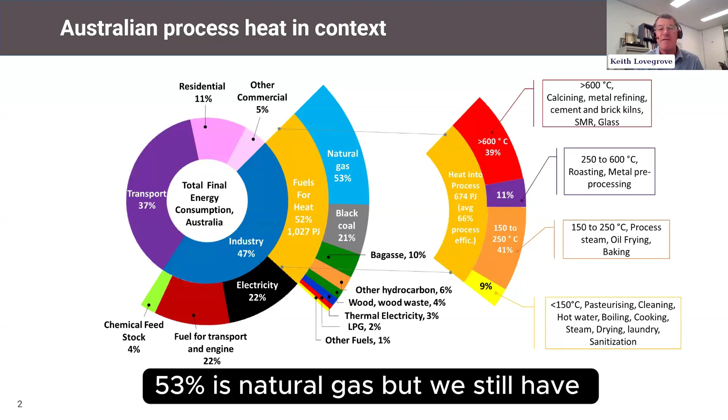Yes, so solar thermal. Thought I'd begin with a little bit of context for Australia. And this is a very similar picture to what you'll find in basically any industrialized country these days. So if we look at total final energy consumption, about 47% is our industry, and of that, 52% is for heat. And of that, at the moment, 53% is natural gas. But we still have black coal being used for process heat in Australia.

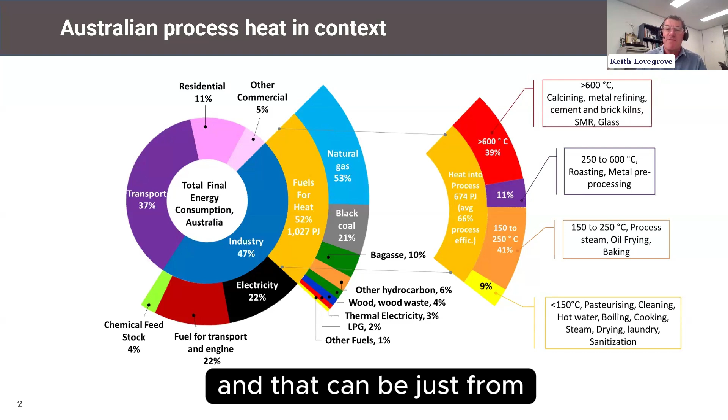Now that we're talking about solar thermal, it's very important to consider the temperature breakdown of the usage. And you can see there that there's quite a lot in that 150 to 250 degrees band. There's also an awful lot in this greater than 600 degrees, and that can be just from calcining and iron and steel and very high temperature processes like that.

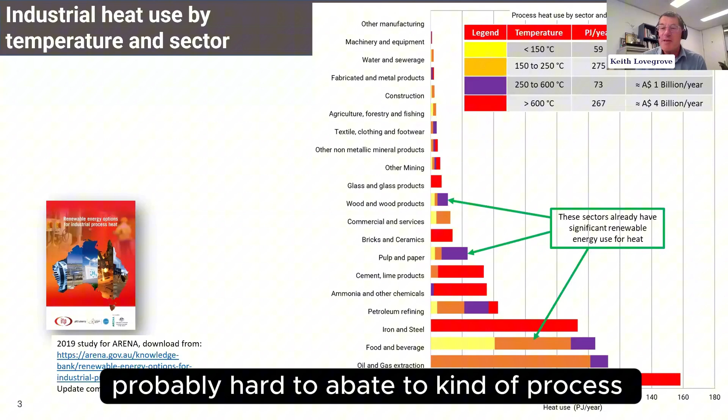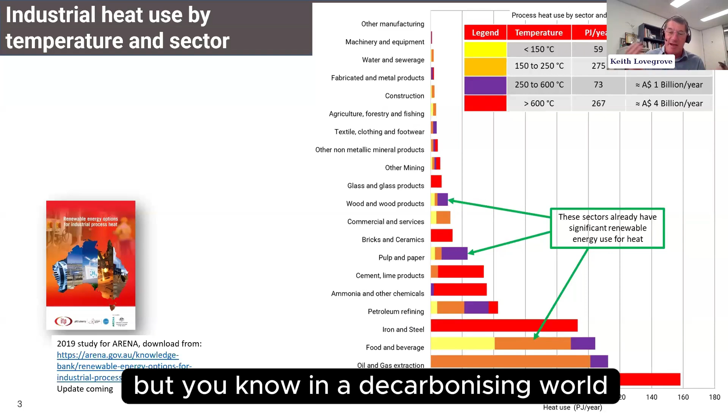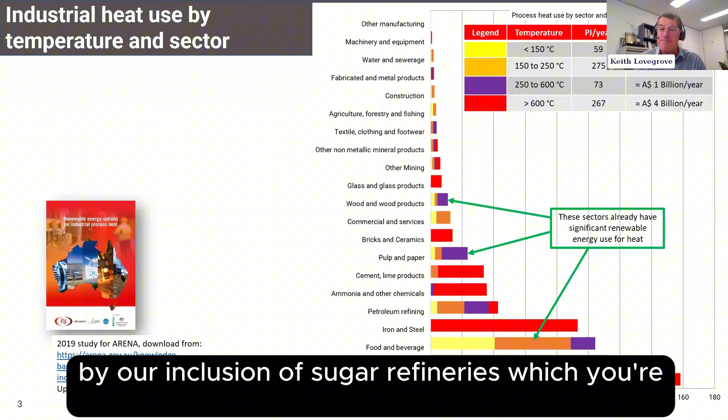So looking at the different sectors that are dominant, we've got the alumina sector as a very big user of heat, and theirs is split sort of 50-50, some very high temperature calcination, probably a hard to abate kind of process, if you will, and a lower temperature digestion. We've got oil and gas, significant there, but in a decarbonizing world, you might say, well, where does oil and gas go? Food and beverage is very important. That's dragged up in that analysis by our inclusion of sugar refineries, which are already using a lot of bagasse waste. So when you take them out, it drops down a bit.

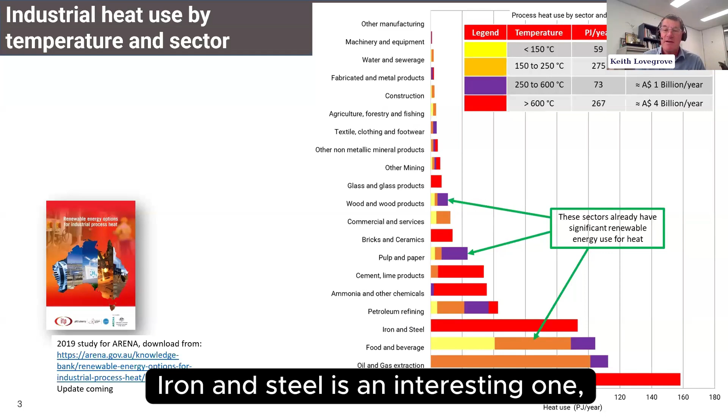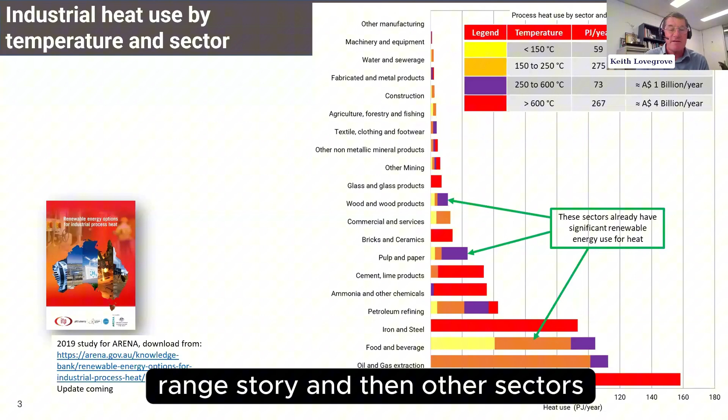Iron and steel is an interesting one. And we've got the whole discussion of Australia as a potential exporter of green iron into the future, but that's a very long range story. And then other sectors going on down there with different temperature splits.

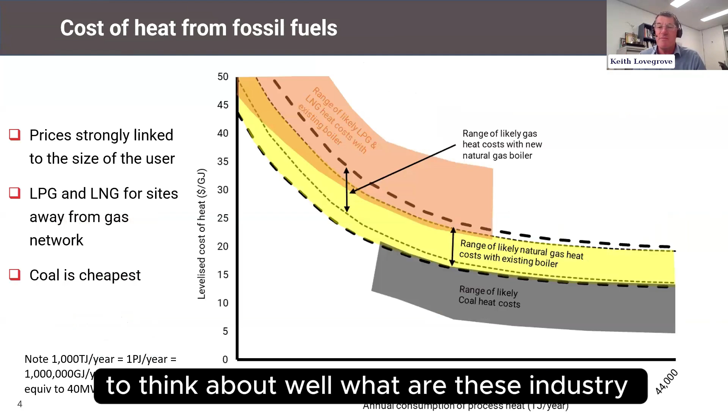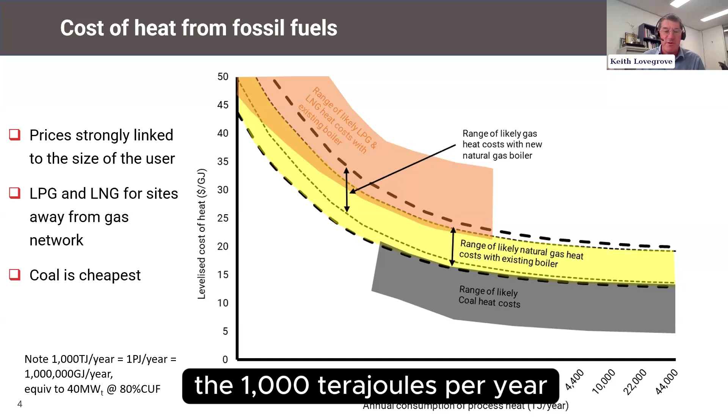We do need to think about the economics, and in that regard, we need to think about what these industry players are paying at the moment. If you look at the yellow bar in the middle, that's to represent natural gas prices. First of all, I'll point out that the horizontal axis there is a logarithmic scale of terajoules per year of consumption. To put that in context, 1,000 terajoules per year would be like a 40 megawatt thermal use at 80% capacity factor. So 100 is 4 megawatts, 10,000 is 400 megawatts.

So very large users, the very, very large 100 megawatt alumina refineries and so on, are effectively paying the wholesale price of gas, which is, according to that graph, between $10 and $15 a gigajoule, very uncertain. But the y-axis there is levelized cost of heat. So that's factoring in an approximately 80% conversion efficiency from the gas to the heat, which is why the wholesale price doesn't match the levelized cost of heat.

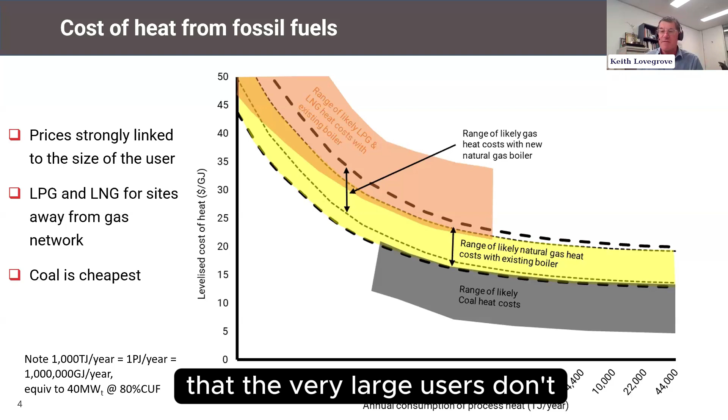It's rather higher. But what you see is, as you come down to smaller users, they pay more and more. They have to pay distribution and retail costs that the very large users don't. So you get that sort of power law dependence. Now, there are some large users still using coal. That's, of course, cheaper. There's some users who are not connected to the gas network who actually have to truck in LPG and LNG. They tend to be smaller, hence those there. So that's what we're competing against.

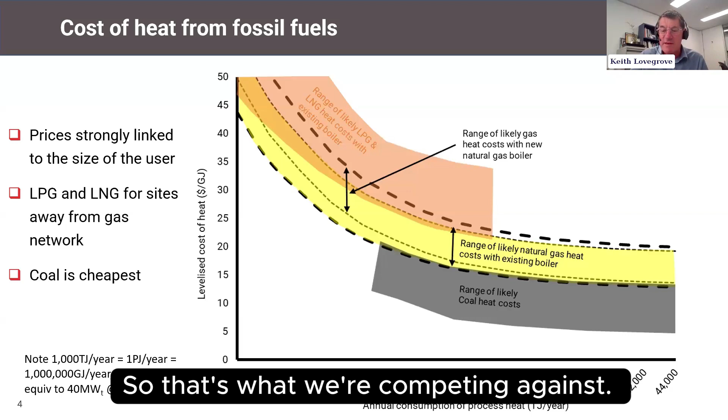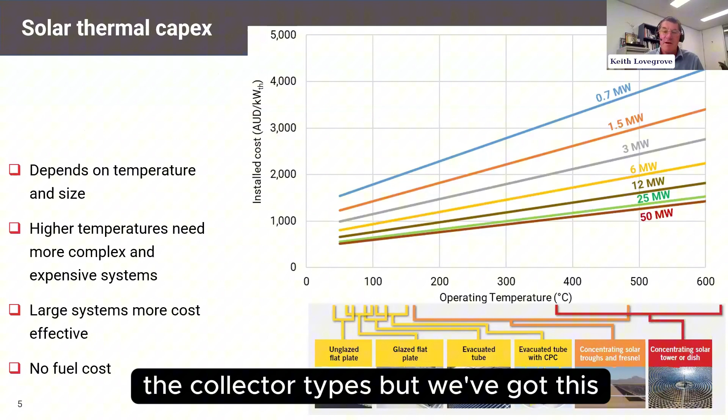With solar thermal, Bärbel's already introduced the collector types, but we've got this progression from, at one extreme, unglazed flat plate, which is your swimming pool heater on your roof at home, just to warm things up to 60 degrees maybe on a good day. And what we're trying to show here is that as you go from left to right on that graph, you're facing increasing complexity in technology in order to get higher temperatures.

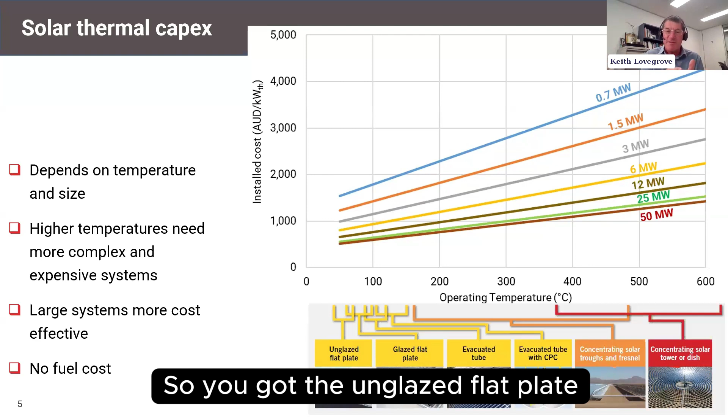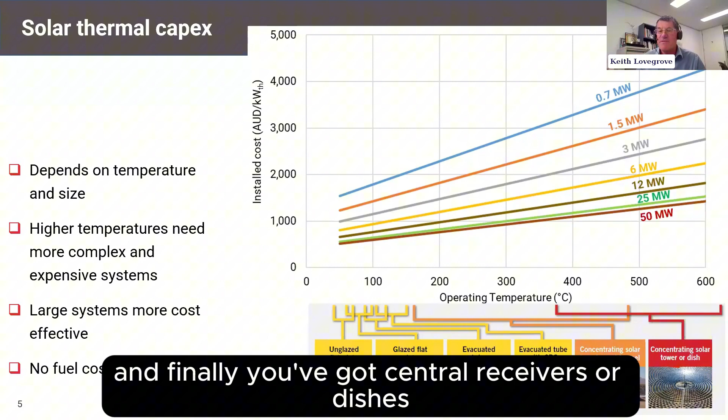So you've got the unglazed flat plate, then glazed flat plate, the old Solahart systems but on a more industrial scale, the evacuated tubes, adding a non-tracking mirror, then you've got the troughs or the Fresnel, and finally you've got central receivers or dishes, which have the ability to melt ceramic bricks if you really want to.

So you can see how that complexity is going to translate to higher capital costs per kilowatt as you seek higher temperatures. The graph is showing that as linear, but let me just say that's a rule of thumb. It's not exactly linear. This is a way of thinking about it.

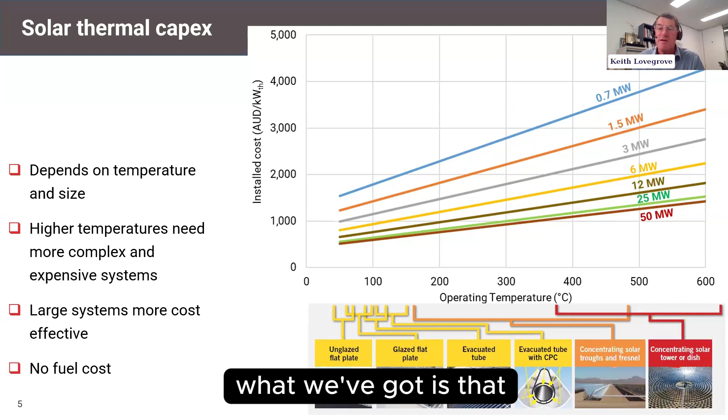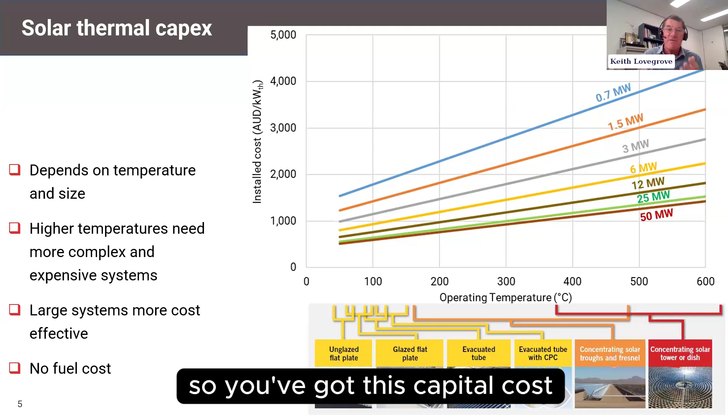But then overlaid on that, this technology, as many other things, has an economy of scale. The bigger systems are more cost effective than little systems. So you've got this capital cost depending on both temperature and size. If we then translate that, how does that compare with what we're paying for heat from gas or coal or LNG at the moment?

We turn our capital costs for the solar thermal technologies into levelized cost of heat. What you can see is you've got this power law effect, the cost effectiveness playing out, that the bigger systems are more cost effective. And interestingly, whilst it is sort of analogous to the size dependence of the cost of gas, it actually comes down faster. So on the whole, the bigger systems are more competitive than the smaller systems.

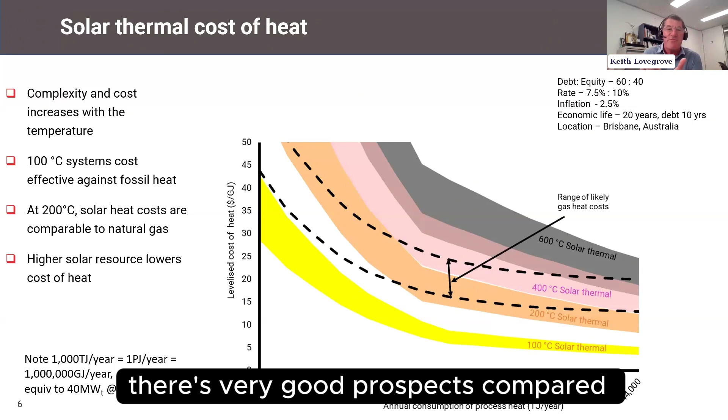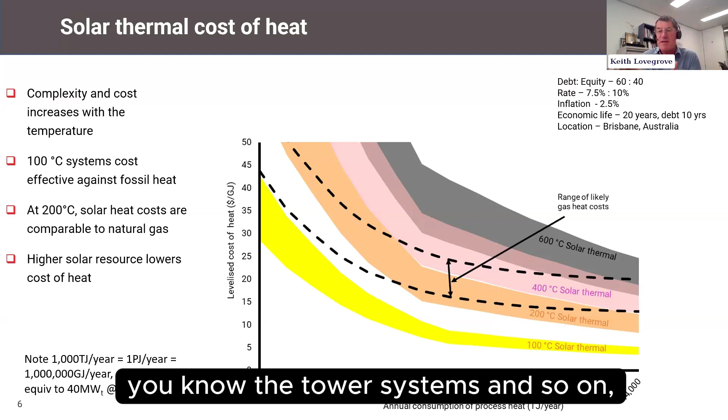There's one factor, but then you also see the temperature dependence playing out. And what we see is up to 100 degrees C, more or less, it looks very competitive at all sizes and even competitive against coal. In the 200 and 400 degree bands, there's very good prospects compared to natural gas for users above 100 terajoules per year. At the 600 degrees, with the tower systems and so on, that's still a bit of a stretch, although it's almost touching some competitiveness under certain circumstances.

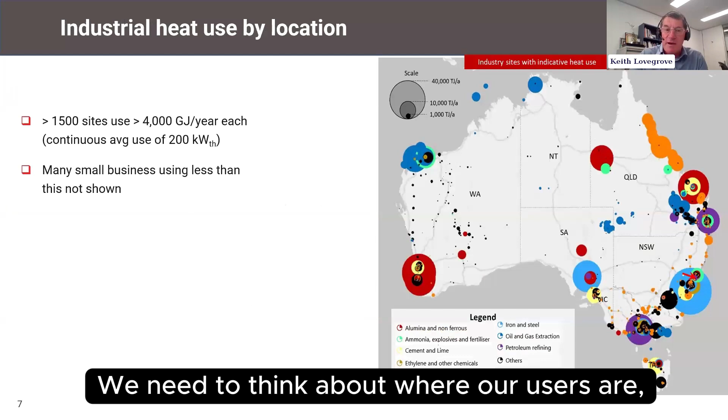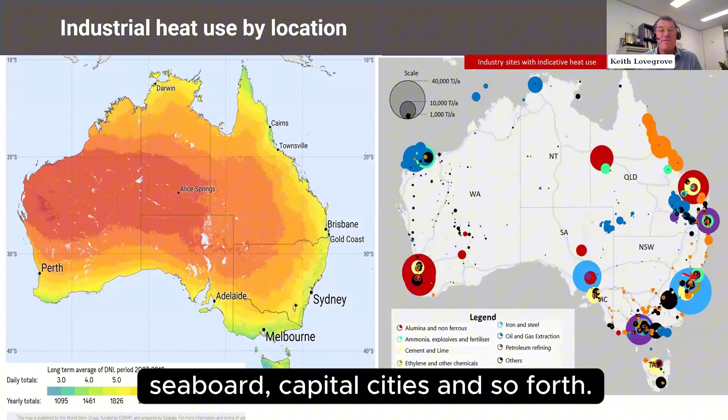We need to think about where our users are. So the map there tries to show different industry sectors, different sizes, different locations. You see quite a bit around our seaboard, capital cities and so forth. The map on the left is direct beam radiation resources. That's what concentrators care about, the direct radiation, but the map of diffuse radiation looks very, very similar.

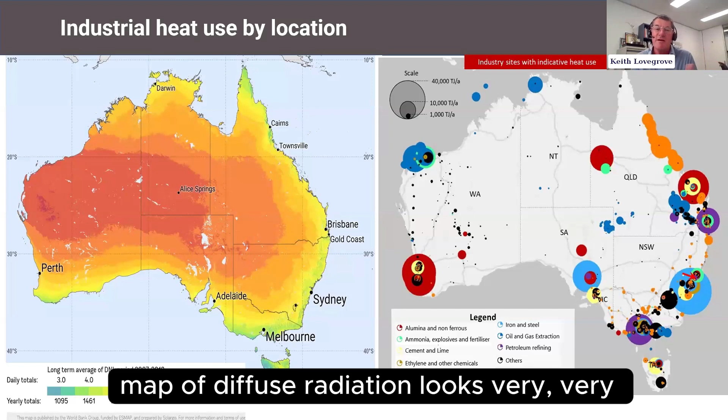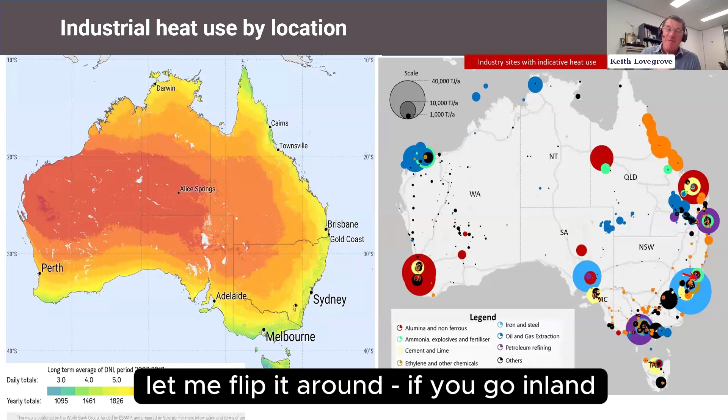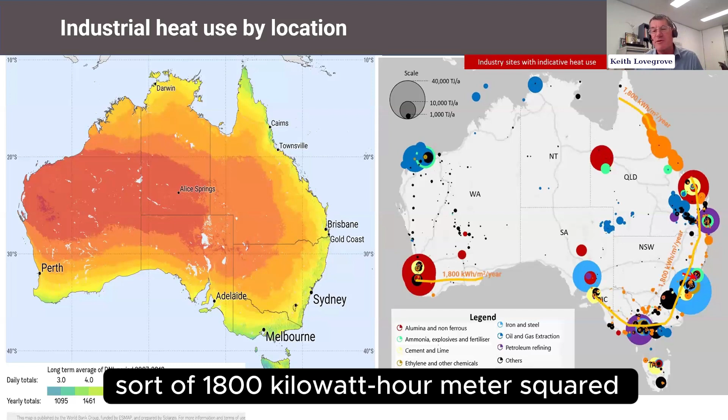So what you see is around the East Coast, near the coast, let me flip it around. If you go inland and you cross the Great Dividing Range, the solar resources pick up. If I just do this 1800 kilowatt hour per meter squared per year contour on our map, what you can see there is that's sort of the limit for where concentrators kind of make sense. So there's no absolute limit with that.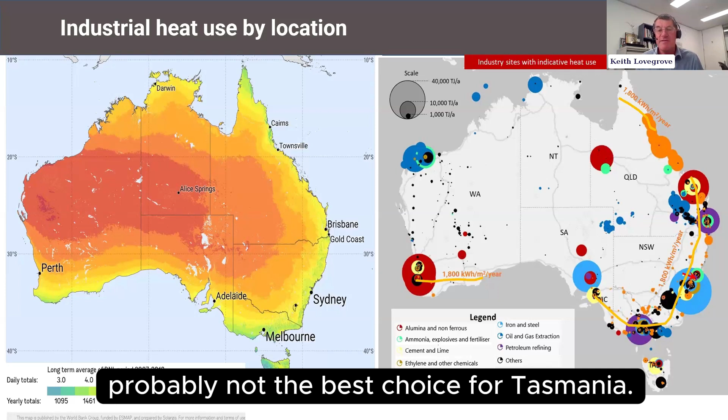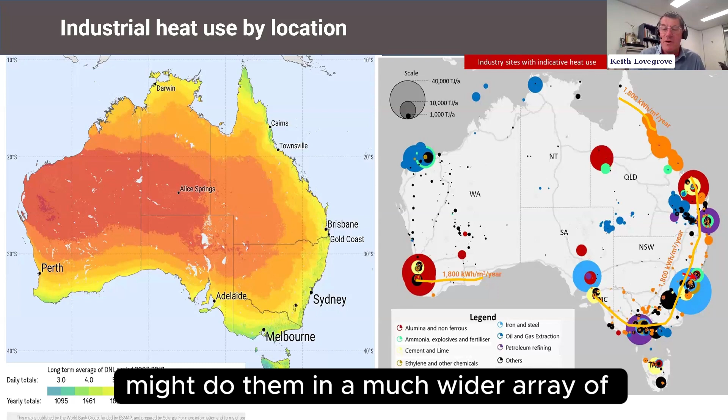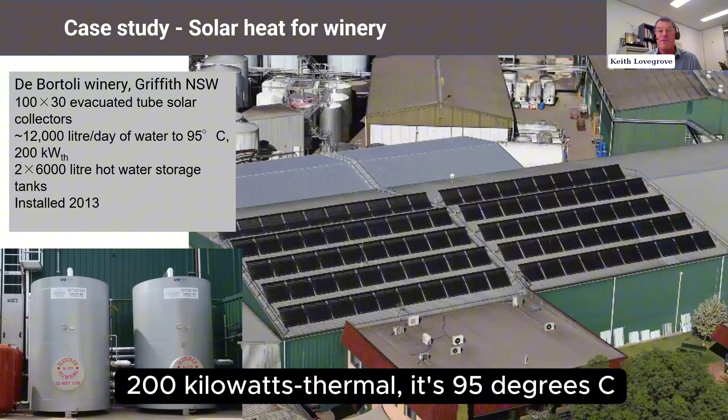But what you see is there's an awful lot of our country that looks very good for solar thermal, and it's probably not the best choice for Tasmania. But at the 100-degree systems, they look so competitive that we might do them in a much wider array of locations as well. So I thought I'd show a few case studies. This one in the winery in Griffith is a really classic one because it's only 200 kilowatts thermal. It's 95 degrees C, and I think we should seriously look around the country at a lot more of that sort of installation. There should be a lot of opportunity for that sort of thing.

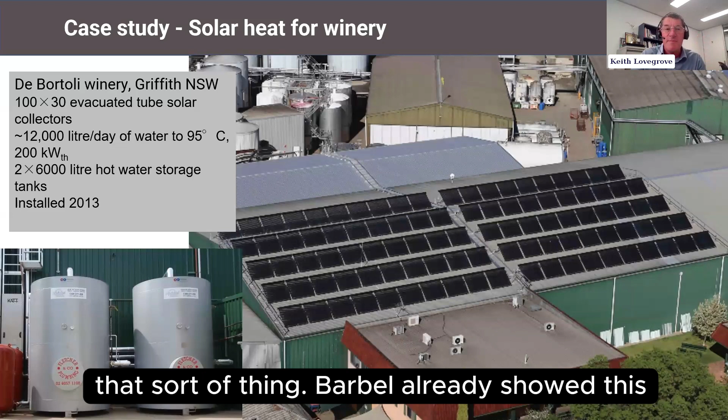Bärbel already showed this, and it's worth showing just because of its scale. What I'd like to point out with this one is that this is a combined heat and power system. So you've got a tower system there, which is capable of huge temperatures, which you don't need because fundamentally they're trying to do desalination and keep a greenhouse warm. But they're using the high temperature steam to do some power generation in a back pressure turbine, then getting the process heat. That's a very interesting configuration and has its own favorable economics. I would say though that the electrical turbine is very much undersized for a 36 megawatt thermal array, but that's just the business decision they made for that plant.

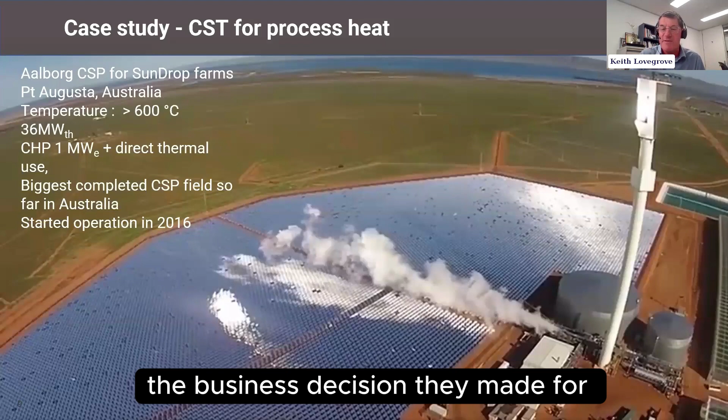I thought I'd show this one as well. It's not Australian, but just because it's so big, and to point out that people have already built solar industrial heat systems on a scale that's already big enough for alumina refineries and the really big end of town. It's worth knowing that.

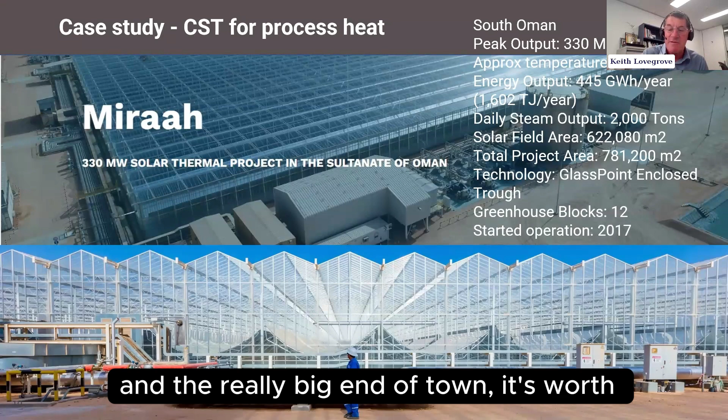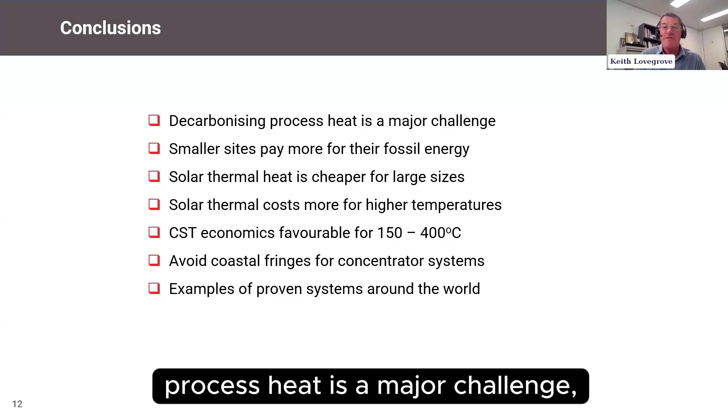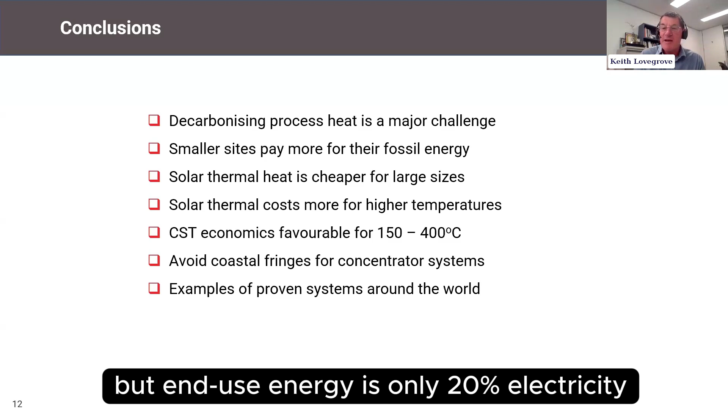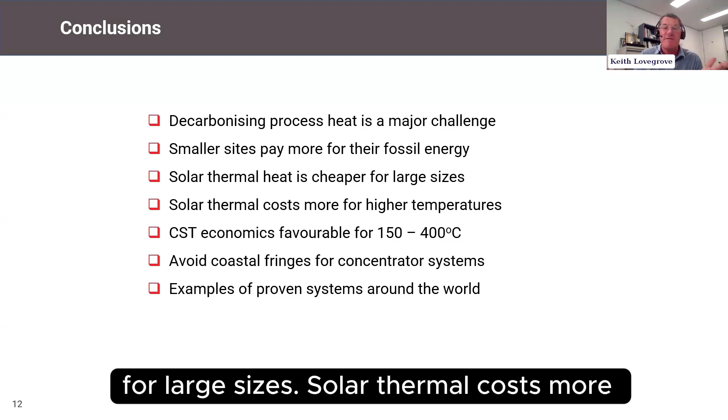So my conclusions: decarbonising process heat is a major challenge. I mean, we all know that. There's a lot of talk about electricity, and the word electricity gets muddled up with energy in some discussions, but end use energy is only 20% electricity and it's 30% heat, and we really have to think about it. The smaller sites are paying more for their fossil energy. Solar thermal heat is cheaper for large sizes. Solar thermal costs more for higher temperatures. This means the economics look pretty encouraging in the 150 to 400 degrees C range, and below as well.

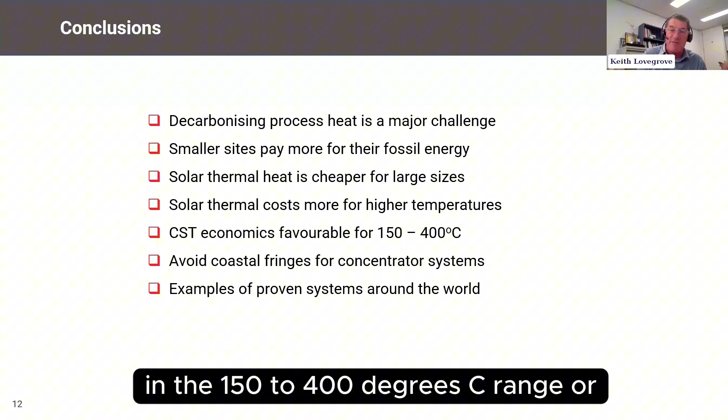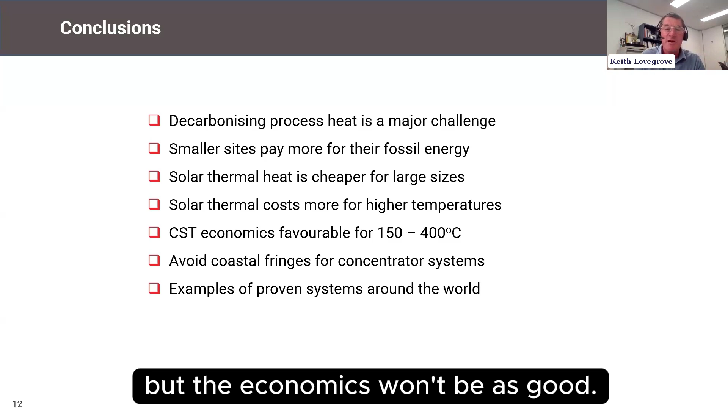Probably avoid our coastal fringes for concentrator systems. No reason that you have to, but the economics won't be as good. And as we've already seen, there's proven systems around the world. This is not new technology.